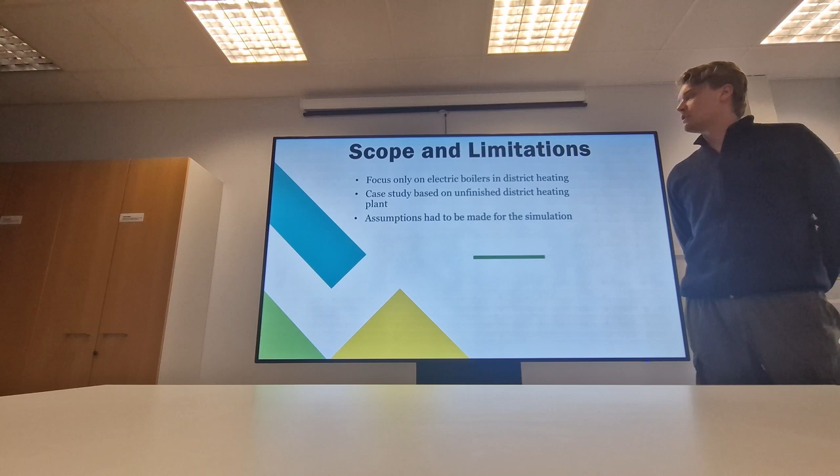Then quickly about the scope and limitations of this thesis. First of all, it only focuses on one plant that I used as a base, so it might not be universally applicable in every situation. The case study is also based on an unfinished plant, so there are a lot of assumptions made, and there are some things not yet known or parts not yet ordered, so it is hard to know exactly what the capabilities are.

You also get less heat dissipation through the pipes. So in rural areas it is much more expensive to build the long pipelines, and you lose a lot of heat in the process.

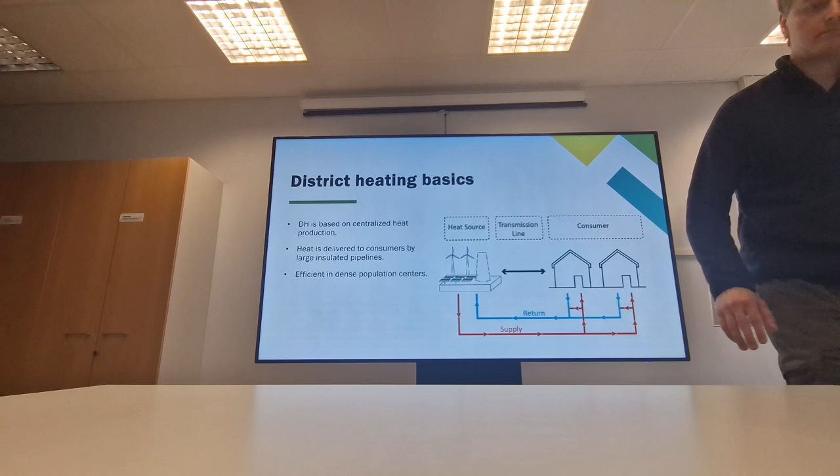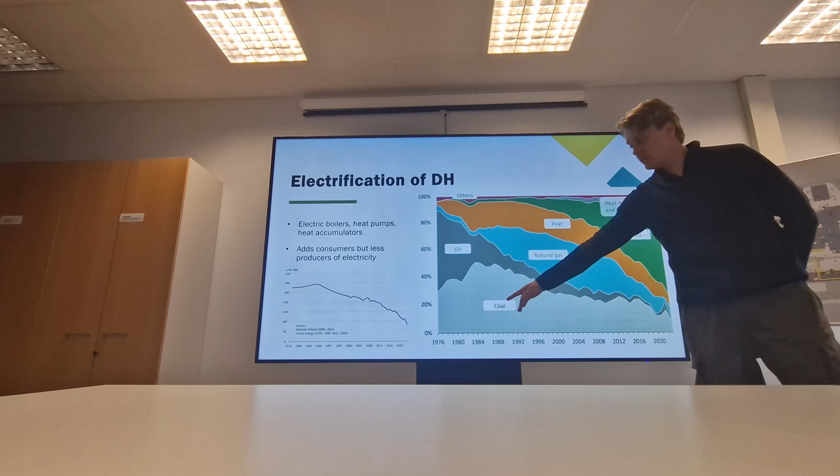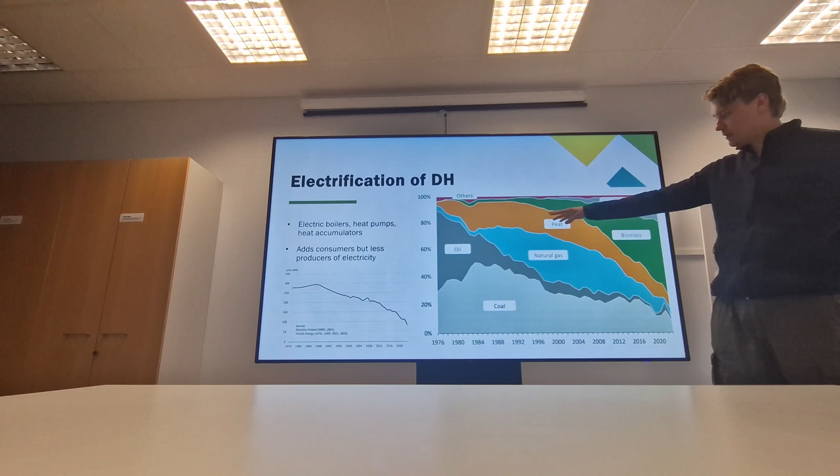Now, electrification of district heating. Electric boilers, heat pumps, and heat accumulators have made a big difference in later years, especially after around 2020. This graph begins in 1976, where you can see that coal and oil were the main way to produce district heating. It's been going down pretty steadily, and now we soon won't have any coal plants operating.

Biomass has also taken a large chunk, but heat recovery and electricity are very rapidly increasing, and in the coming years it's going to be a very substantial amount of district heating production.

Electrification, as I mentioned before, adds more consumers of electricity but fewer producers. This is part of the problem that we need to tackle.

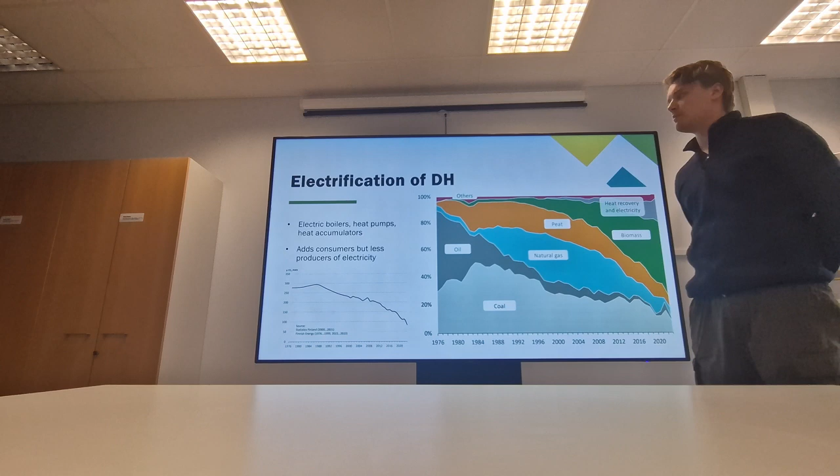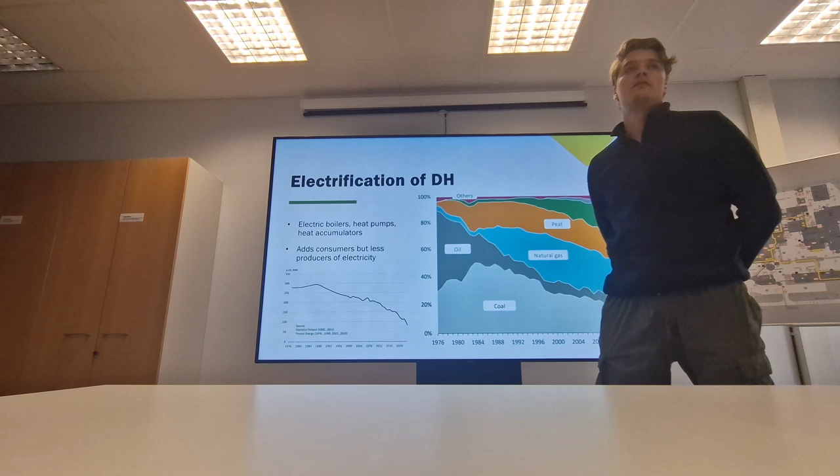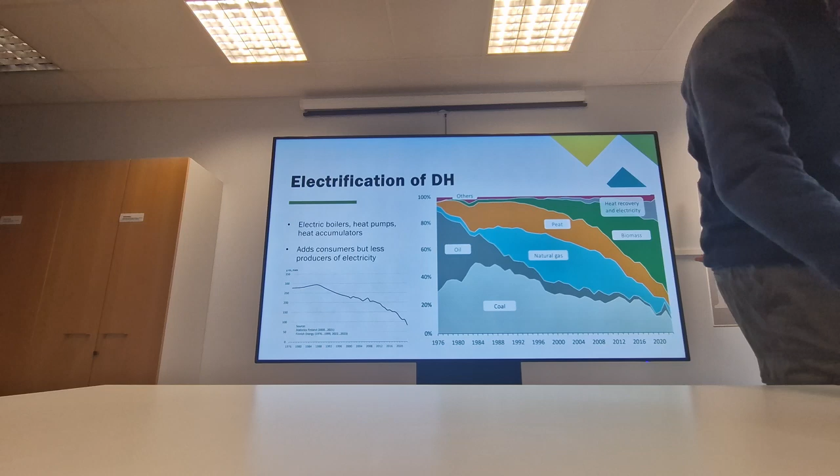Here you can also see the CO2 emissions of district heating have been going down very fast, and this is one of the reasons why it is a very good way to heat, as it will soon be a very minimal CO2 emission way of producing heat.

The main focus of this thesis is the electric boilers. As I mentioned before, there are also heat pumps, but they are not really that good at altering their power, so they are out of the scope of this thesis.

There are many different kinds of boilers, but I'm focusing on electrode boilers because they have fast ramp-up speeds and very high efficiency compared to resistance boilers, which are usually used in lower or smaller applications due to the slower rate of heat transfer to the heated medium. In electrode boilers, the electricity goes through the water and is conducted through it, and the water itself heats up through resistance.

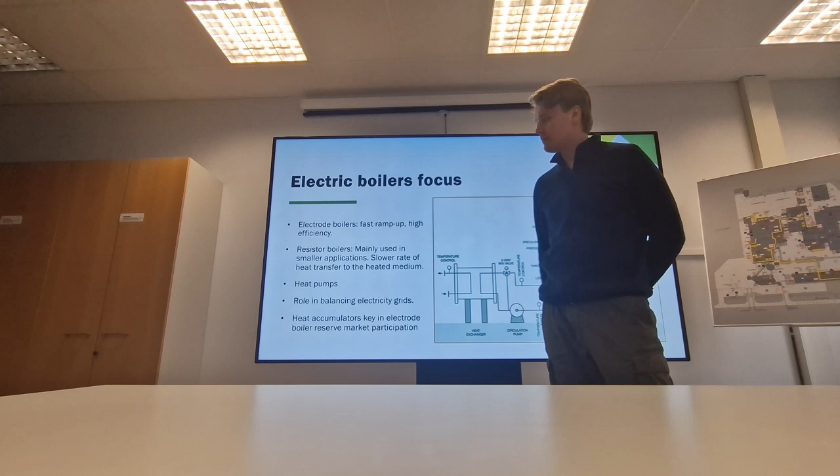These are very good because of the fast ramp-up speeds, and it is good for electricity grid balancing.

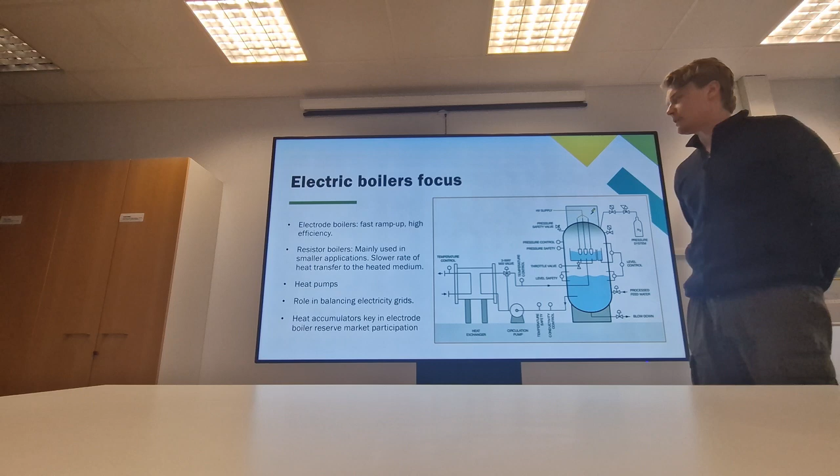A quick note that heat accumulators are very key in this, for boilers participating in the markets, as the need for heat is constant, and there's a certain temperature of water you need to supply that can't really vary that much. Big variations can also lead to problems in the network, such as pipes bursting, so we don't want that.

And then a little bit about the reserve market. So now that we have more wind and solar, there's less grid stability and need for fast flexibility. Basically we just want to have these different components in the grid that can flex according to the needs of the grid. Let's say it's not that windy someday, then we need something to either produce more electricity or reduce the consumption. The flexibility of electric boilers is very good for this.

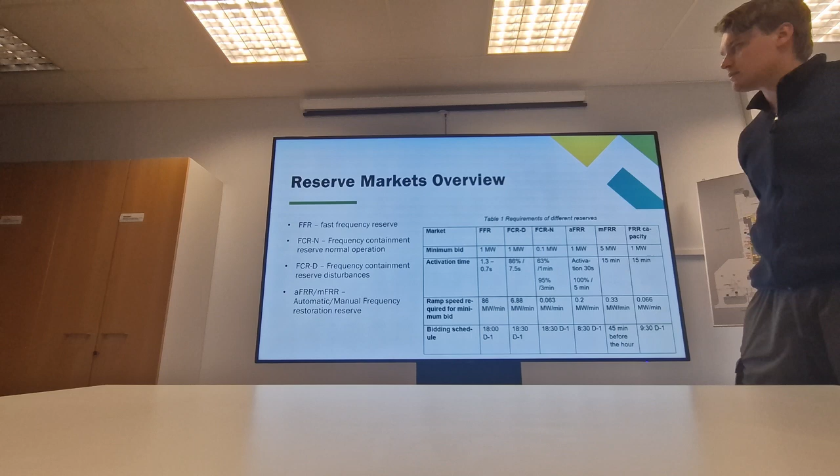Then the overview of reserve markets. The fastest one is the fast frequency reserve, which is mainly for low inertia situations where an HVDC link or a power plant fails, and then we're trying to keep the grid over 49 Hertz, with 50 Hertz being the normal operating frequency, so we don't want it to deviate by over 1 Hertz.

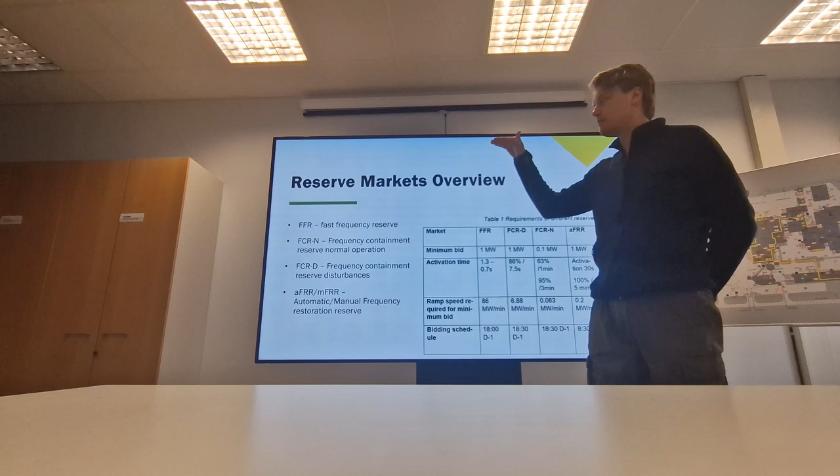The next one is the FCR-N, the frequency containment reserve normal operation, and this is for deviations of 0.1 Hertz from 50, so 50 to 50.1 or 49.9. It's activated linearly: at 50 it's 0, and at 50.1 it's full activation, linear through that range. It's continuously operating, and it's also symmetrical, so it goes up and down.

And then we have the FCR-D, which is for disturbances from 0.1 to 0.5 Hertz deviation. This is for higher deviation, so it's a little bit faster reserve, but the same way, it's linear in that frequency range.

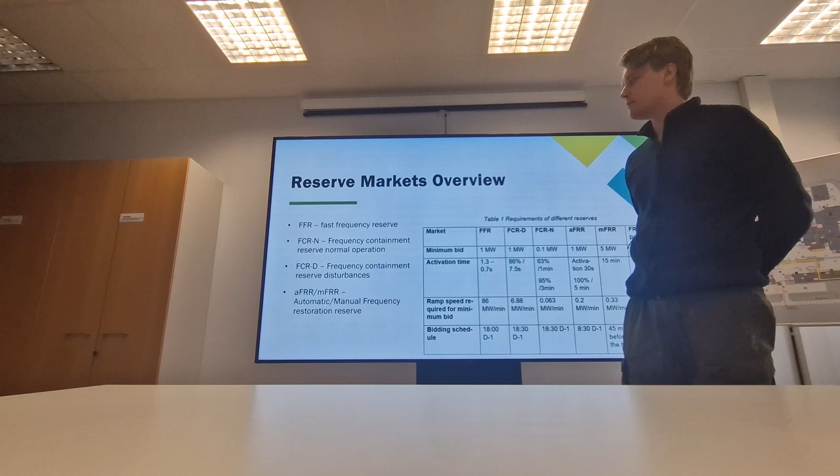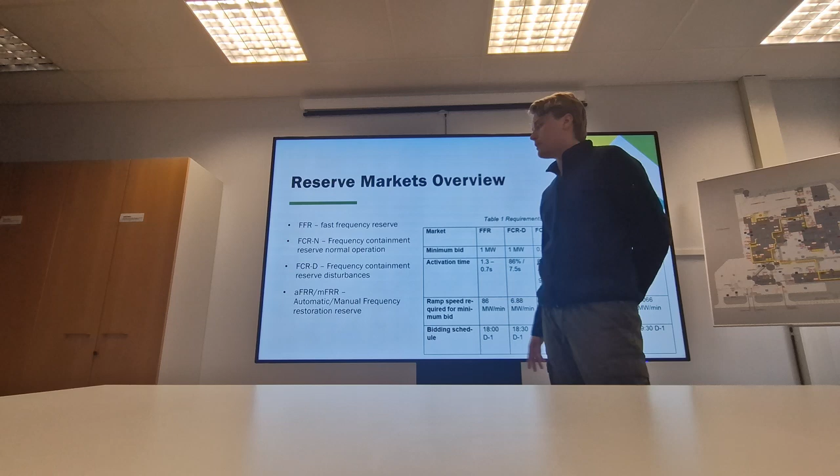And then the last one is the automatic frequency restoration reserve and manual, and this is sort of out of the scope of this thesis, because the activation times are like 15 minutes, or in the automatic case 30 seconds, and 5 minutes to 100%, which is plenty of time.

So we know that we can take part in these reserves, and we are mainly concentrating on the FCR-D and the FCR-N, because the FFR minimum bid is 1 megawatt, with activation at 1.3 to 0.7 seconds, which would mean a ramp speed of 86 megawatts per minute, and that is way too fast for district heating.

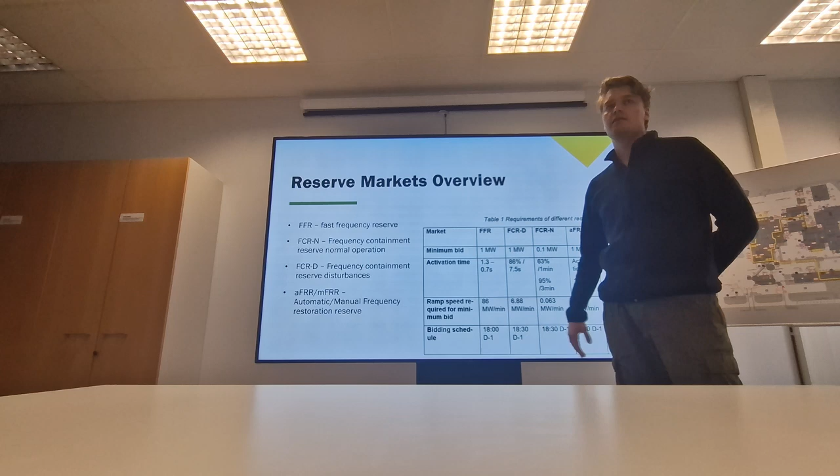In this thesis, in the later case study, the electric boiler is limited to 20 megawatts per minute for safety reasons.

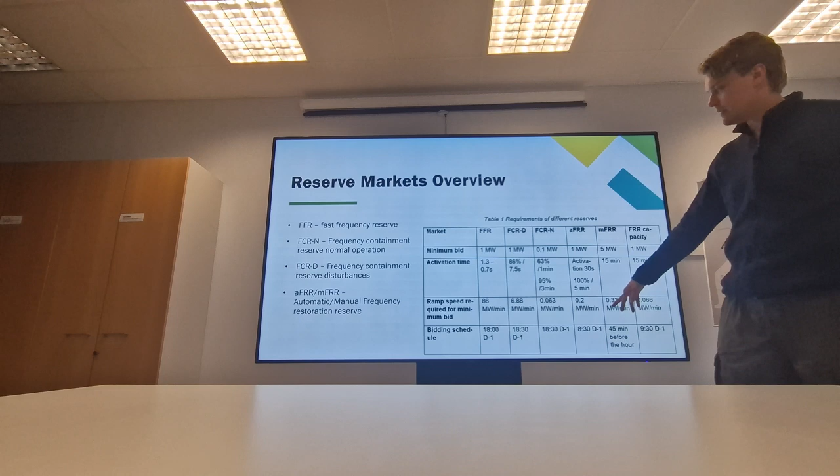But yeah, as we can see, FCRN with the minimum bid has a very slow ramp speed, and with the FCRD it's a little bit higher, but it's still within the 20 megawatts per minute. So those are our main markets.

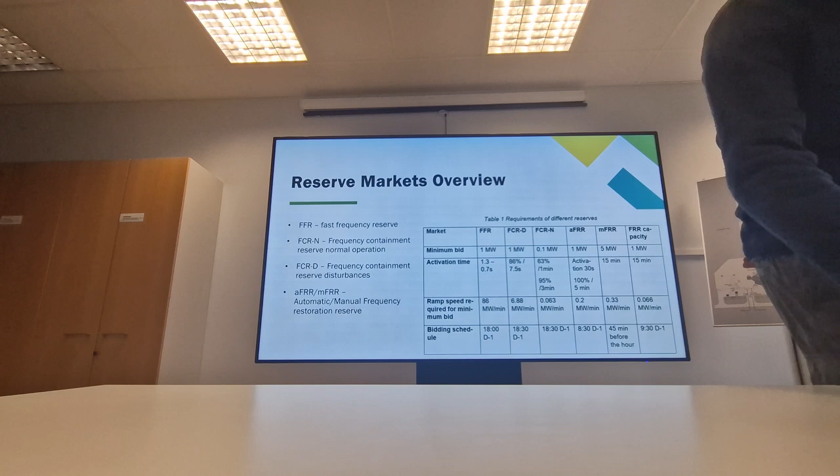And here now the case study. For the case study, I built a model using the Apros simulation tool, of the upcoming Nuijala plant for Fortum. And here is the simplified version.

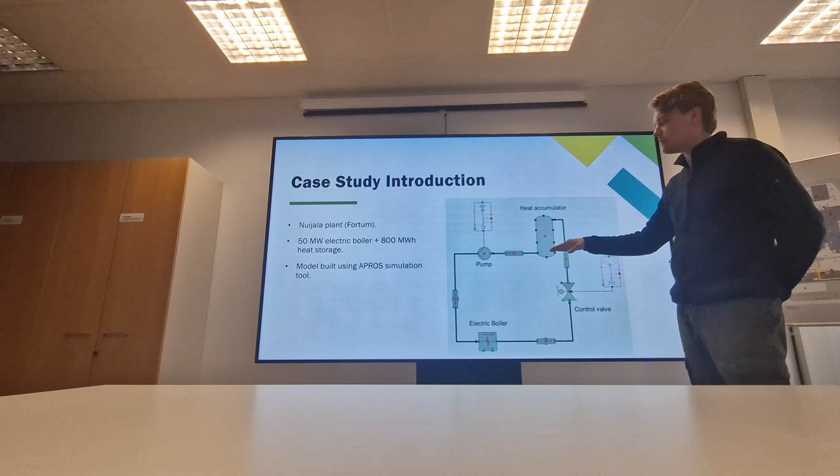So basically we have the heat accumulator: hot water goes on top, cold water is at the bottom, and it gets layered. For the simulation it's just 2 layers with no mixing, but in reality there's also not that much mixing, as it's usually pumped and emptied at a very steady rate.

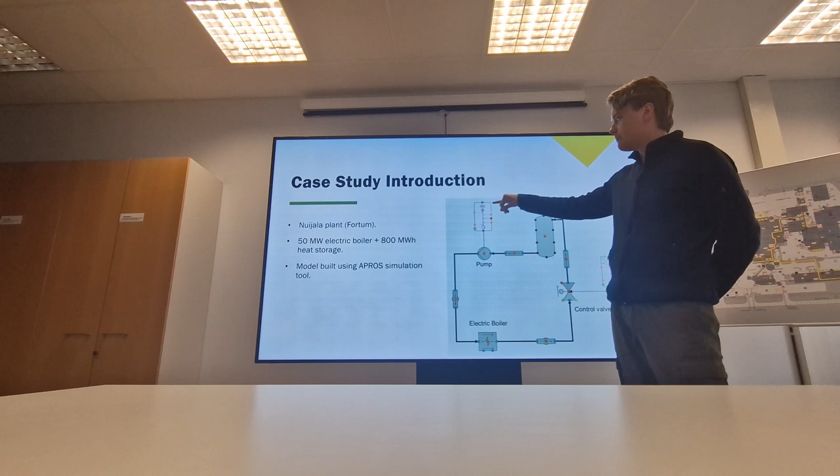Then we have pipes, and a pump controlled by a PID controller, whose main function is to keep up the pressure difference on either side of the pump, and technically on different sides of the control valve. Then it goes to the electric boiler, heats up through the heat exchanger, and then there's a control valve that changes the flow in the system.

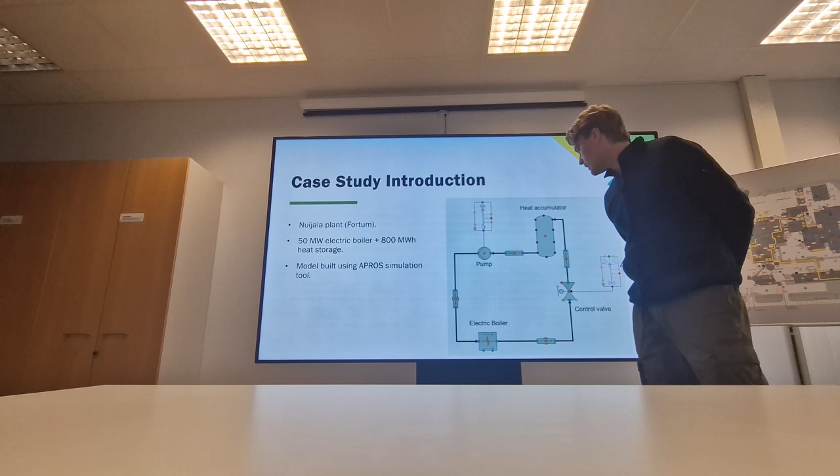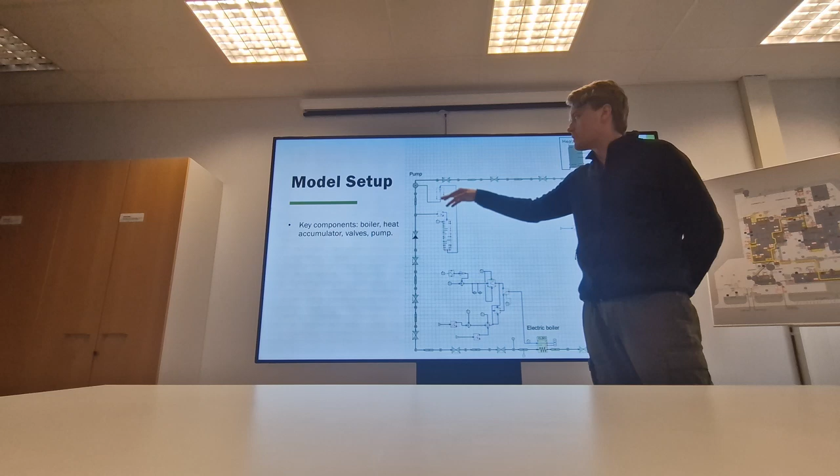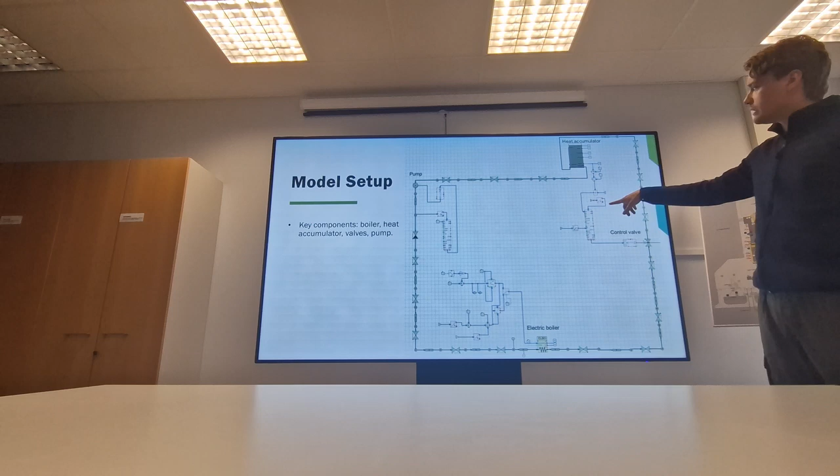These are the main components we are looking at, and here is the broader model actually used. It has more valves for accurate pressure loss, and we can see the control systems here, checking the pressure and keeping it up, and then the control valve gets from the PI controller the value of the cold water, and then it calculates what should be the flow with the desired power level from the electric boiler.

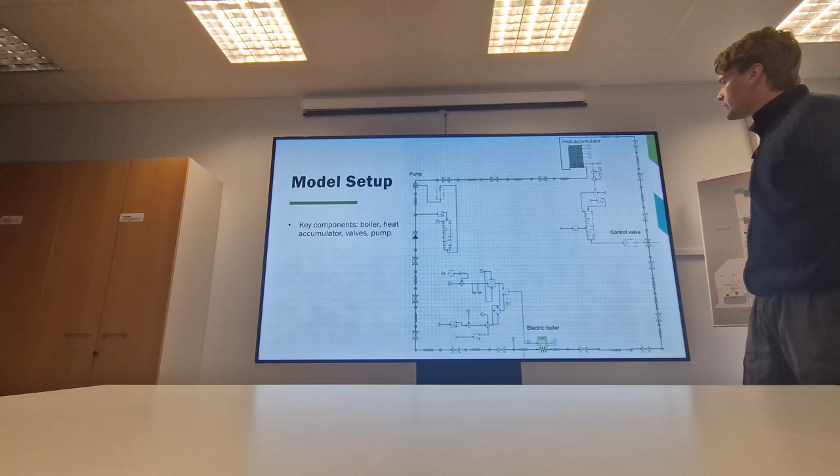So first you input the power level, and then it calculates what is the required flow rate.

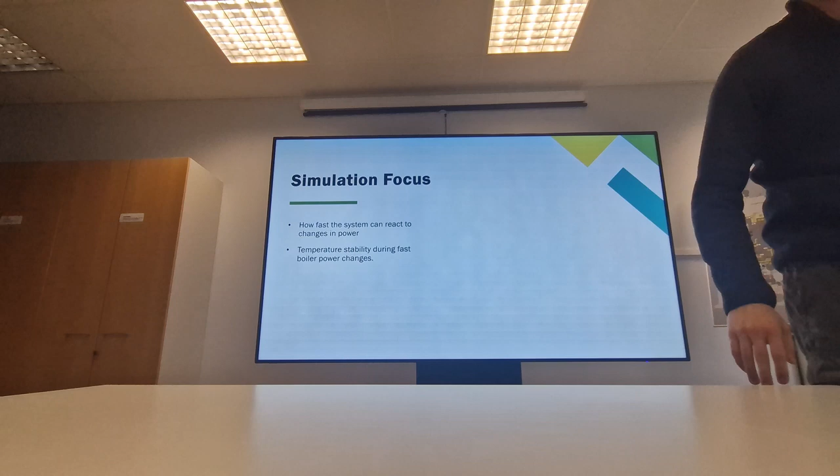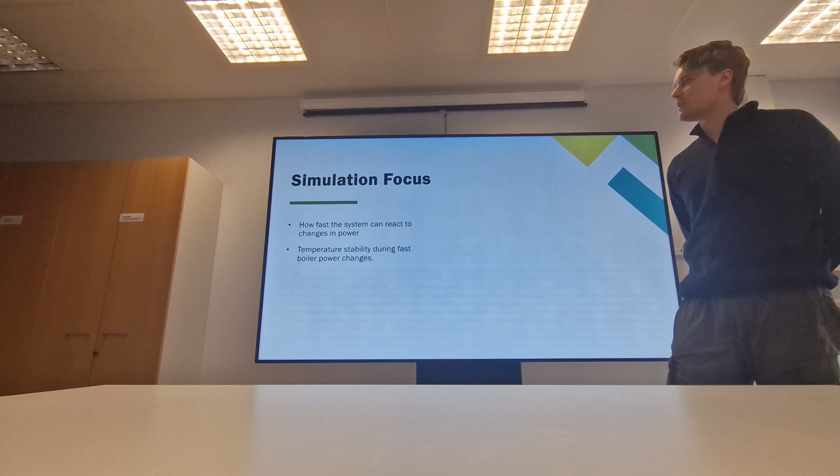And the focus is pretty simple: we want to see how fast the system can react to changes in power. We know the electric boiler can do up to 20 megawatts per minute, but what happens with the temperatures and pressures, and can we get the valve working in unison with the electric boiler so that we can get stability in the temperature, and also we just basically need the flow to match the power output.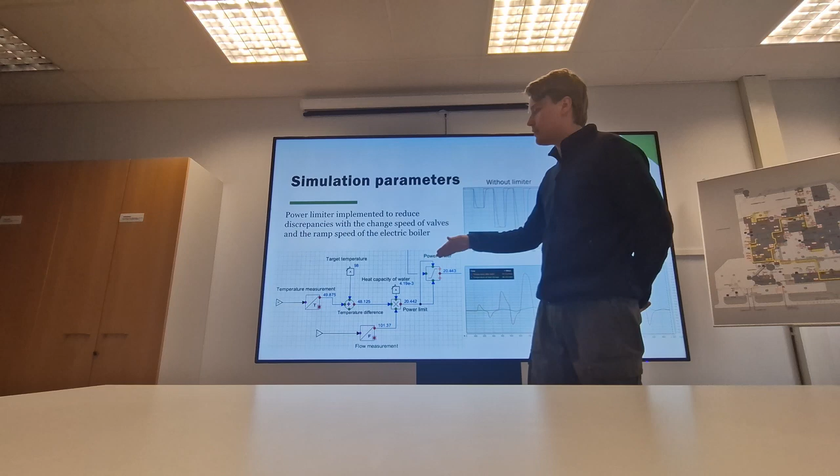And then some parameters for the simulation. A power limiter was implemented, which takes the target temperature, the temperature measurement before the boiler, and the flow before the boiler, and then calculates the maximum power output so that the water doesn't go over 98 degrees.

So it just works. We can see here, without the limiter, it is very fast. In the working example, the red one is target power, so when target power is set down, the measured power comes a little bit later because it's controlled by the PI controller.

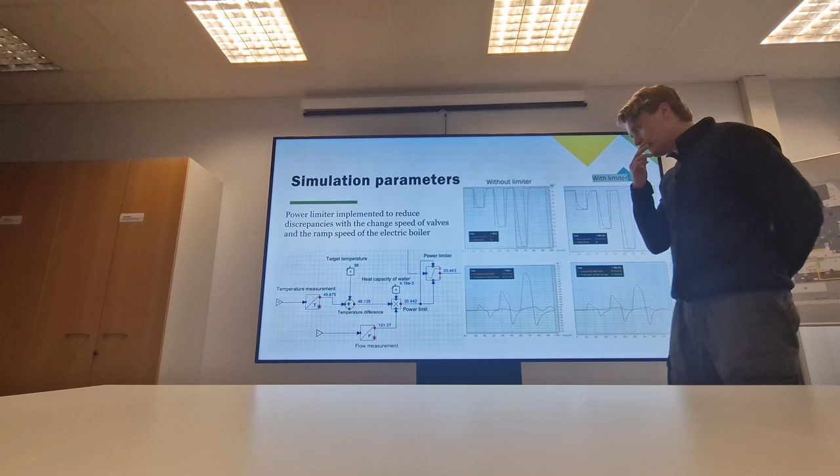Here we can see the temperature change. The red one is right after the electric boiler, which is much higher. You can see it goes up to 112 Celsius, which is too much. But the green one, when it enters the heat accumulator, which is the more important one, as you don't want it to go over 100 degrees because then there are problems with boiling and steam, and it just shuts down if it goes over that.

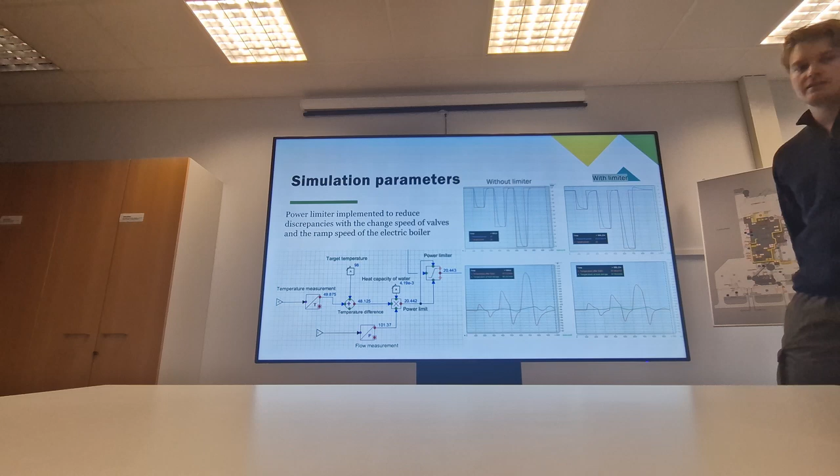So that is the more important one, but it's also important to see that if there's a large deviation, it will eventually cause problems. Here we can see with the limiter, it's sort of the same, a little bit slower to reach the target power, but the change is that the temperature stays at around 98 degrees at maximum, close to 99, but doesn't go over 100 or close to that. And after the boiler, it's only 107 degrees in this case, so it is more acceptable.

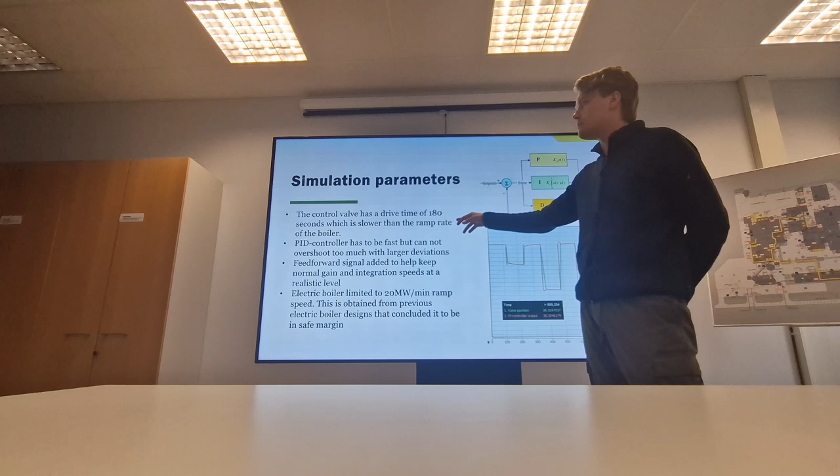And then the control valve has a drive time of 180 seconds, which is slower than the ramp rate of the boiler. So it's 180 seconds from 0 to 100% open.

And then there was the basic outlook of what the PID controller looks like. In this case it's just a PI controller, but we can see how it works. On red we have the controller output, and green is the valve position. The valve is slower than the controller, and because the controller had to be quite fast in this case, it overshoots a little, but then it meets with the valve position, and it doesn't create too much overshoot or undershoot in this system. The electric boiler is limited to 20 megawatts per minute.

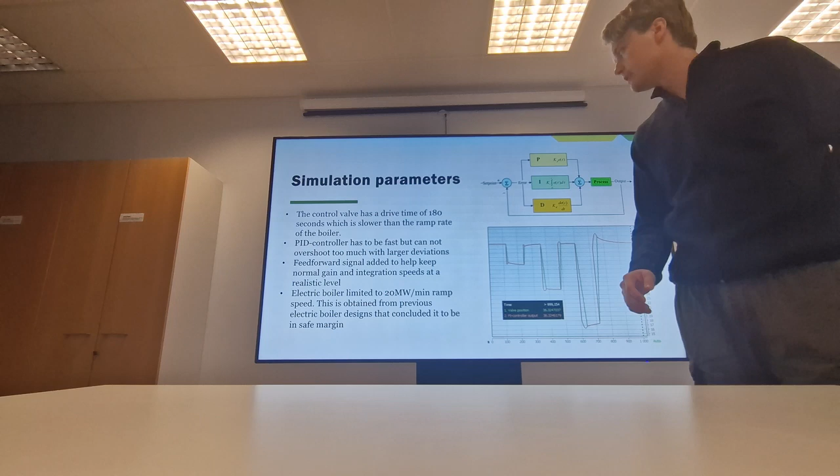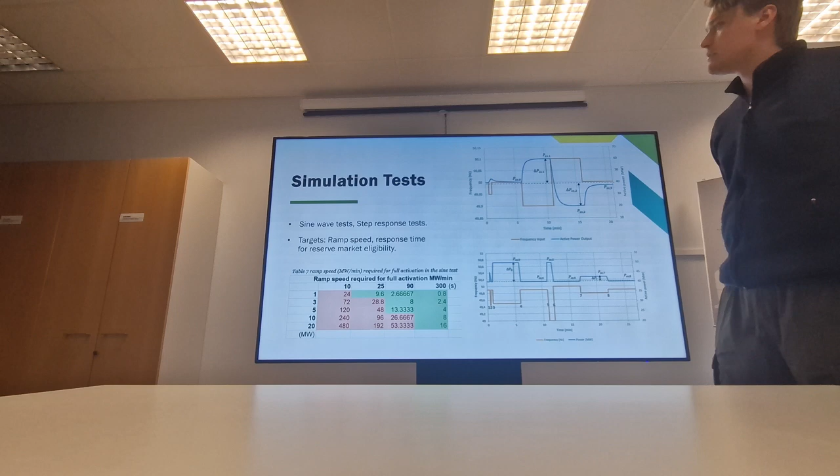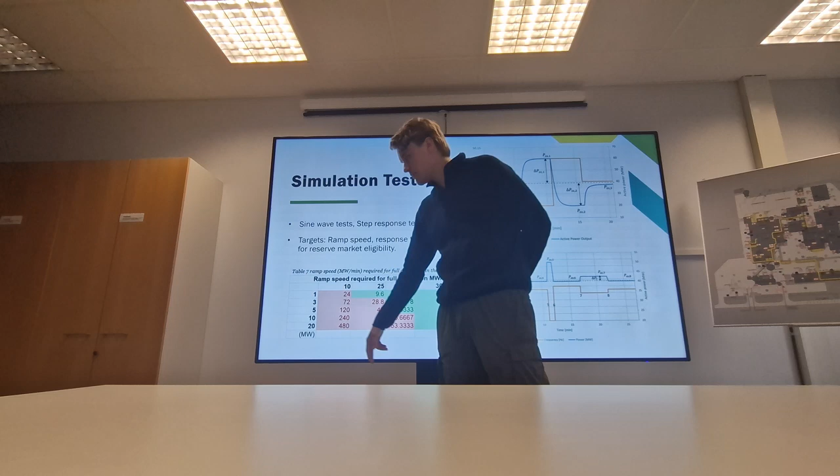And now to the tests. These are tests you have to get through to be accepted into the reserves market. Here's the sine wave test basics: you have 10-second wave speed, 25, 90, and 300, which just means how often it completes one loop. And then you have the megawatt amounts of 1, 3, 5, 10, and 20. First I calculated which go into the 20 megawatts per minute boiler restriction.

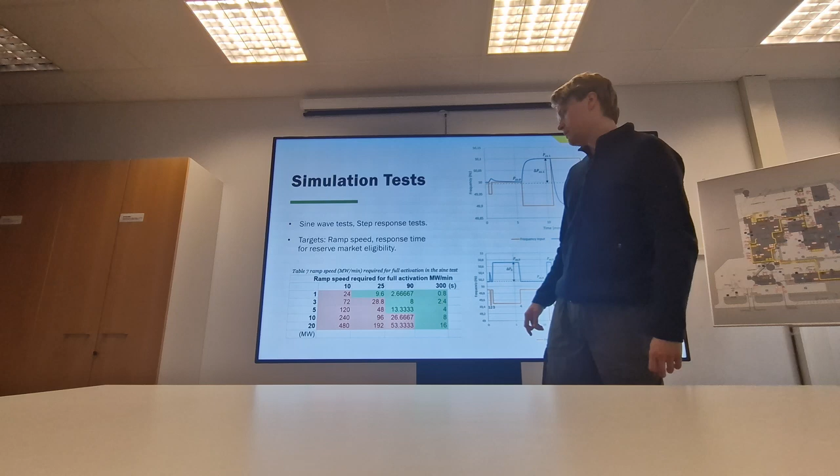We saw that at the 10-second test, even 1 megawatt is too much, and from 25 seconds we can do some. In the sine wave actual simulations, I chose the highest megawatt amount for each acceptable test: 1 megawatt for 25 seconds, 5 megawatt for 90 seconds, and 20 megawatt for 300 seconds.

And for the FCR-N, the step test looks like this: it goes down, up, and then back to baseline, and it has to be within the acceptable margins in the test. For the FCR-D, it's sort of the same, but much faster with bigger deviations.

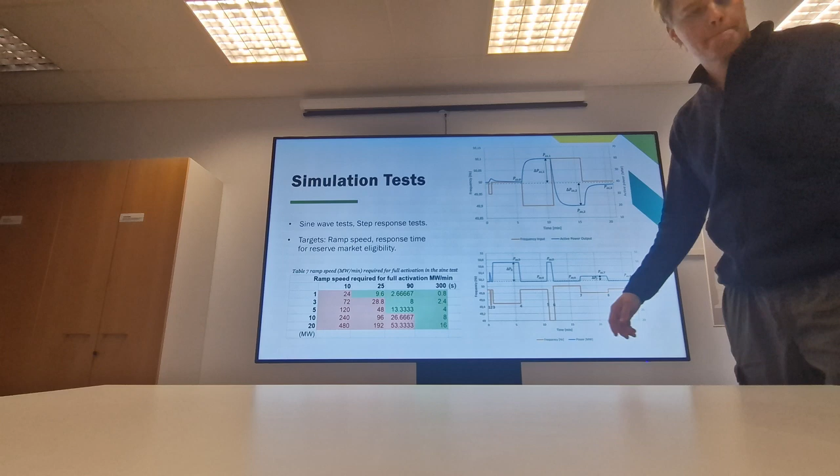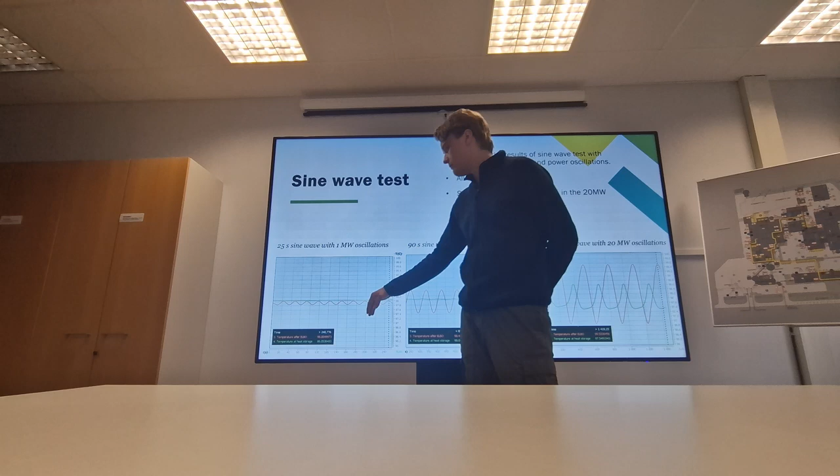So here are the results of the sine wave test. What we can see on red is the temperature after the electric boiler, and on green when it reaches the heat accumulator. We can see that for the 25-second sine wave, there is basically no difference in the temperature at the heat storage. Pretty much the same for the 90-second 5 megawatt test, but at the 300-second 20 megawatt test there's a somewhat large deviation both next to the boiler and at the heat storage. But we can see that 98.6 degrees is the highest at the heat accumulator, so it is within acceptable limits.

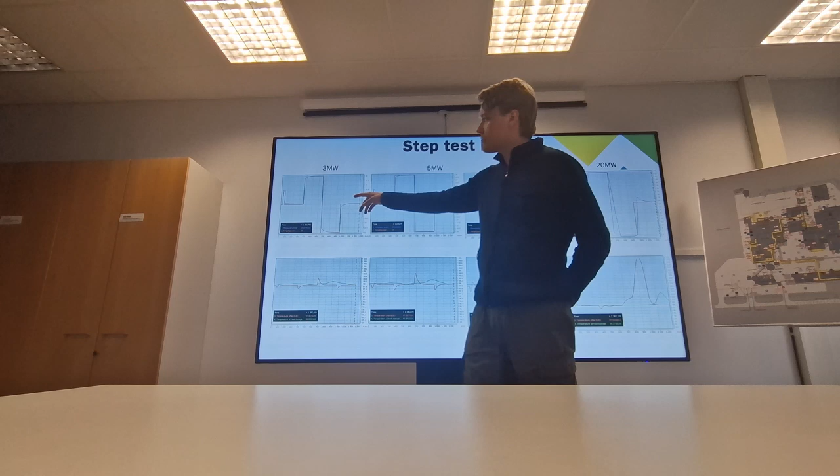And here are the step tests for FCR-N. First we have the measured power in blue, and red is the target power, and below it is the same test but just the temperature, red after the electric boiler and green at the heat storage. From these we can see that each one is within acceptable limits.

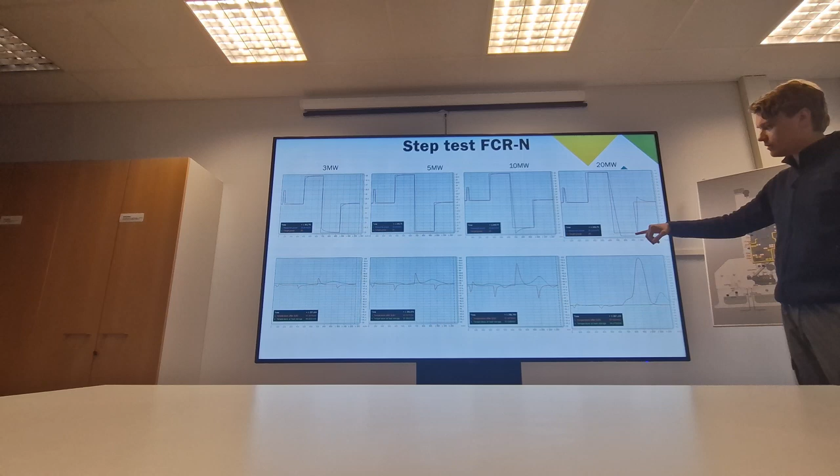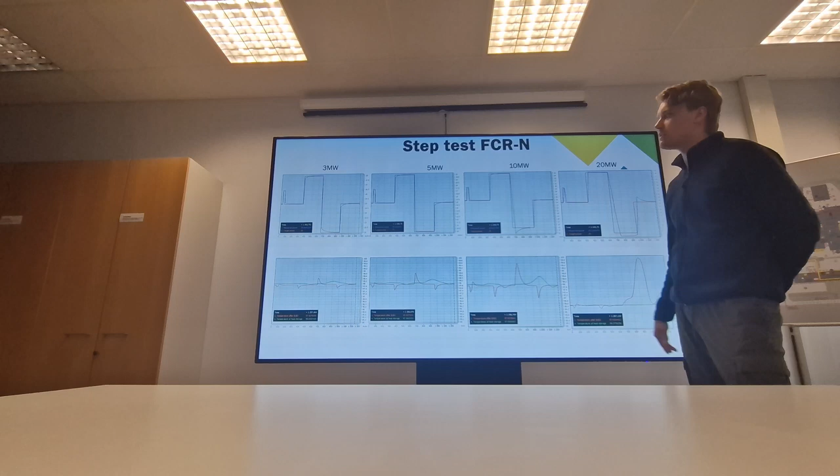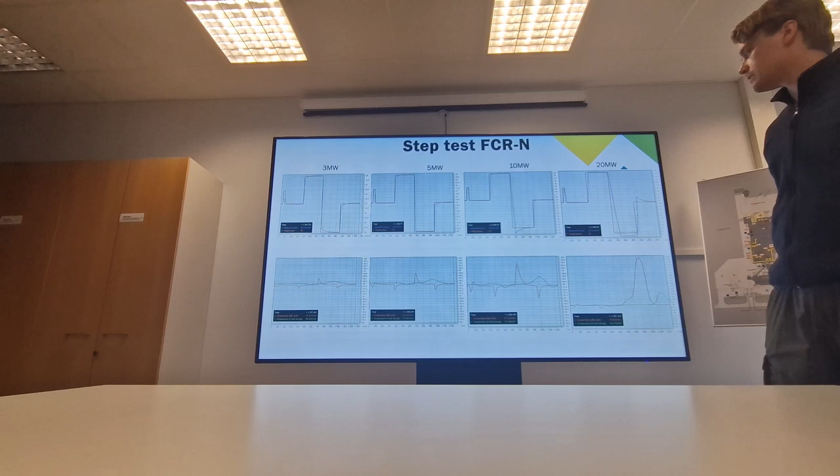The measured power reaches the target power quickly enough, and there is some overshoot in the higher ones, which comes from the controller having to be really fast, so it tries to increase quickly and goes a little over, but there's a 20% overshoot allowance and 5% undershoot, so overshoot is preferable. The only exception is the 20 megawatt test: the temperature goes to 102, 103 degrees at the accumulator, so it is not within acceptable limits, but the other ones are.

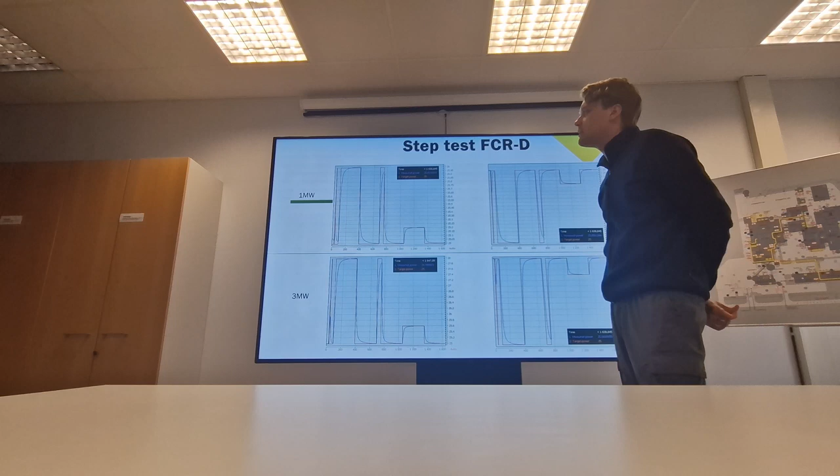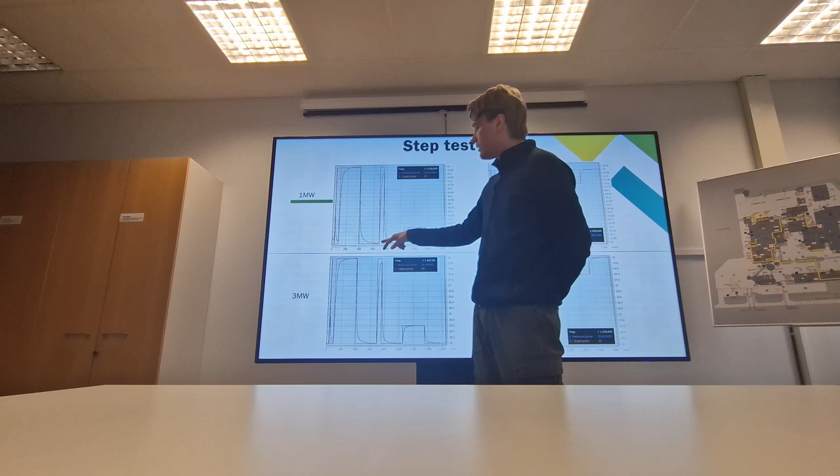But then for FCRD, I only inspected the 1 megawatt and 3 megawatt tests, as the other ones were already too fast just by calculating the speeds. Here we can see that the power doesn't even reach the bottom at many points, and same for when going upwards. So this was not within the acceptable limits. There was too much undershoot, especially in the fast sections of this test. So it would not have been okay.

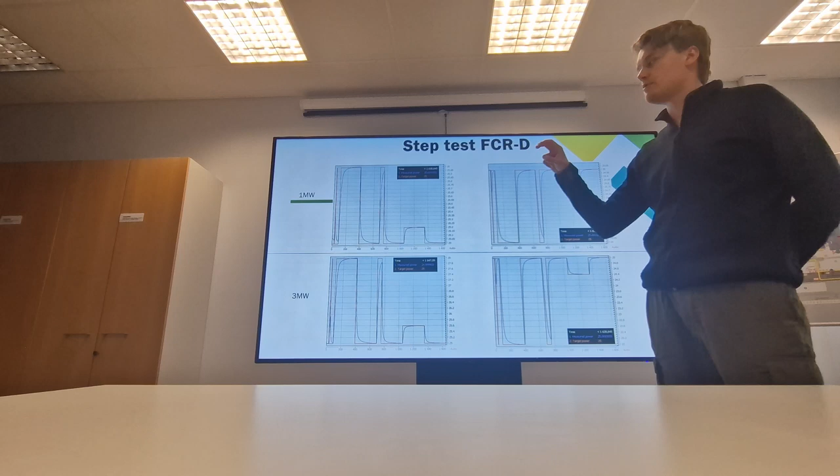But this is partly because of how the controller is tuned. So it is possible to get it to work with this system if you just adjust it to a smaller bid size, but then it couldn't do the bigger bid sizes.

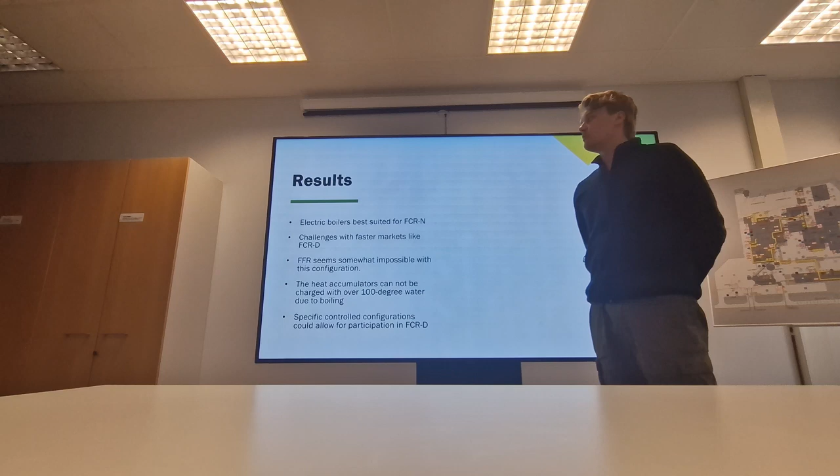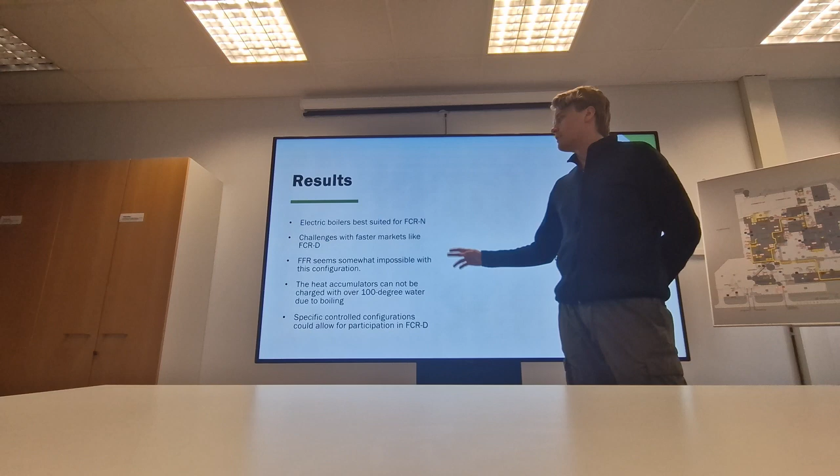So the results are that the electric boilers are best suited for FCRN, and there are some challenges with FCRD, but it is possible with specific controller configurations that could be made just looking at trying to get into specific FCRD markets with, for example, a 3 megawatt bid. It is definitely possible. And then FFR seems somewhat impossible due to how fast the ramp rate should be.

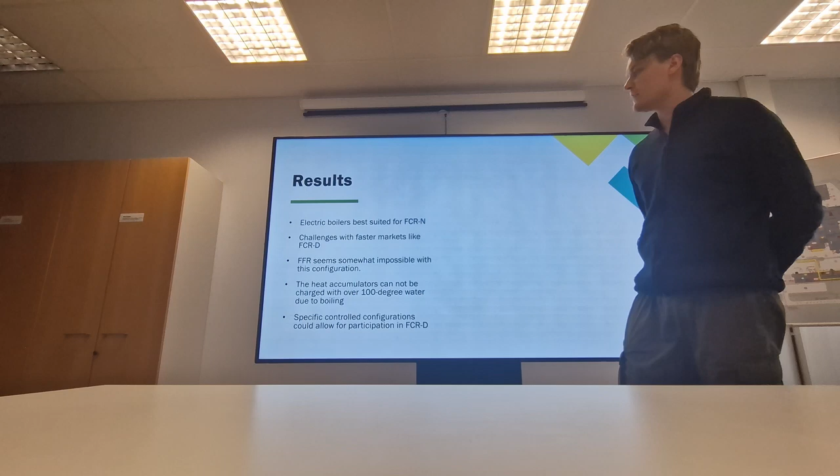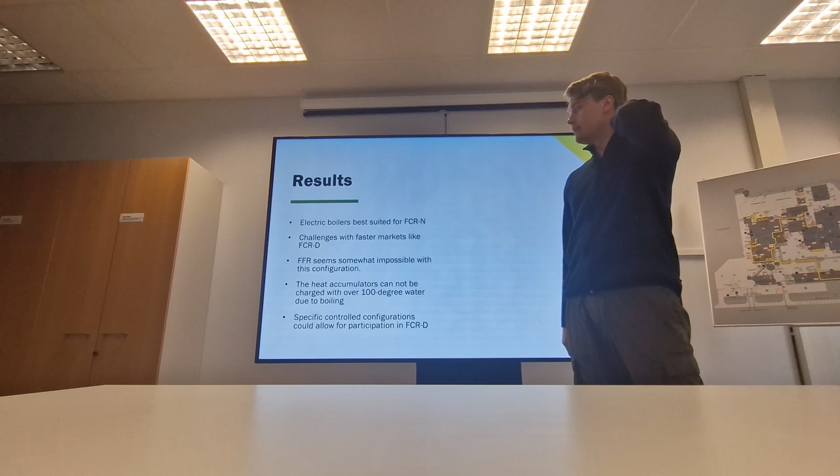And then the big problem being the temperature, and in this case the heat accumulator cannot take over 100 degree water, and that was the limiting factor in many of the failed tests.

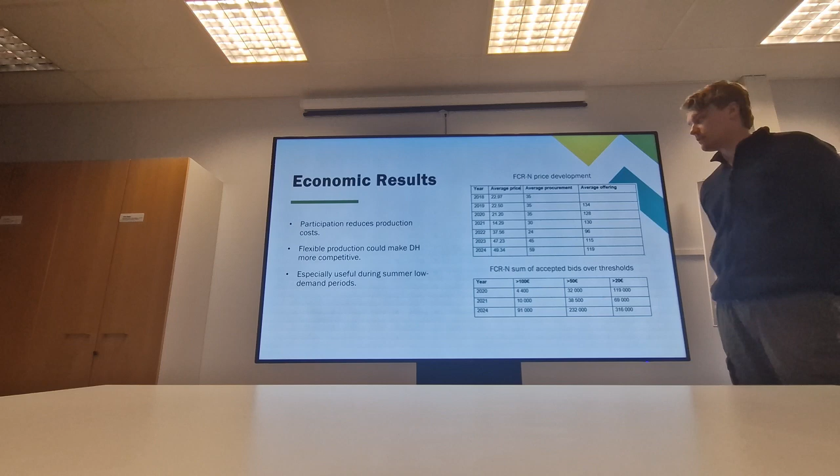So there is a lot of money in here, because as we saw, 20 megawatts could be possible, 10 definitely could be possible, so that could amount to 3.16 million a year extra revenue.

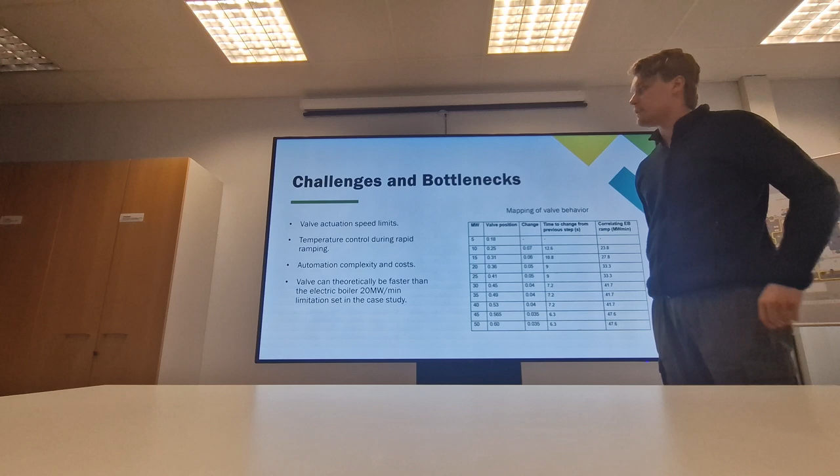And the challenges and the bottlenecks, obviously the valve actuation speed limits. But here you can see as the valve is not entirely linear, at first it opens much more for each megawatt increase, but for example if you are running it at 5 megawatts and want to get it to 10, then the ramp speed is 23.8 megawatts per minute.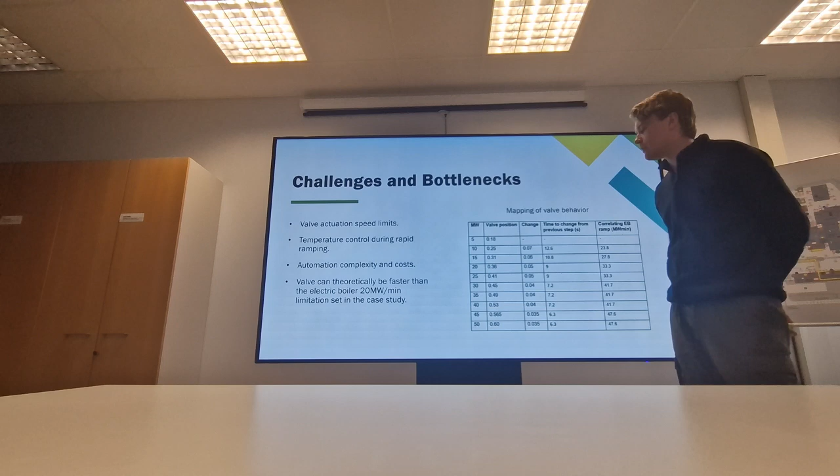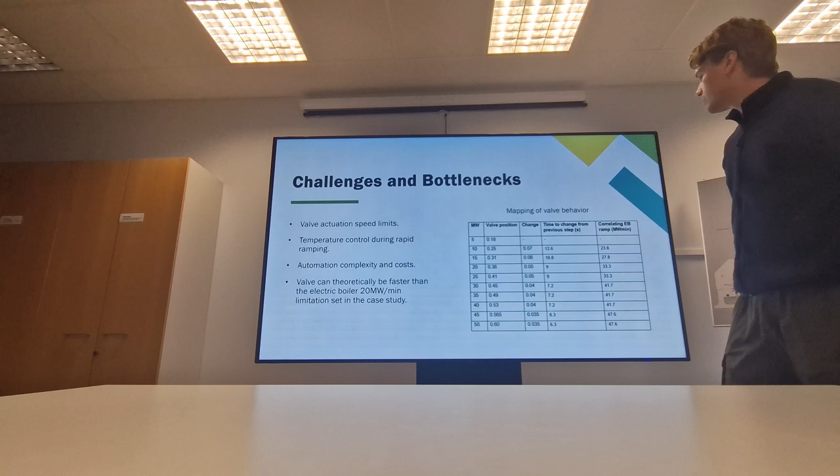It's the correlating curve. This doesn't account for the controller's slowness, just if the valve would move linearly. And then from 45 to 50 megawatts it has to open much less, so then it correlates to 47.6 megawatt ramp. So the valve might not actually be the problem.

There are also obviously faster valves that could be used, so it is one important part to think about. And then the main problem is the temperature control during rapid ramping, and this comes down to how the controllers work and how it would work together with the electric boiler. It could increase the automation complexity and costs.

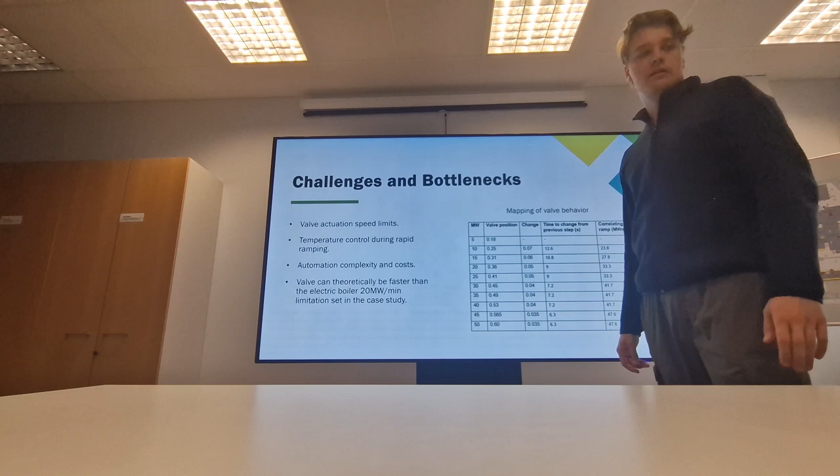And there is potential to increase the electric boiler ramp speed. This was just set from earlier designs from earlier electric boiler plants.

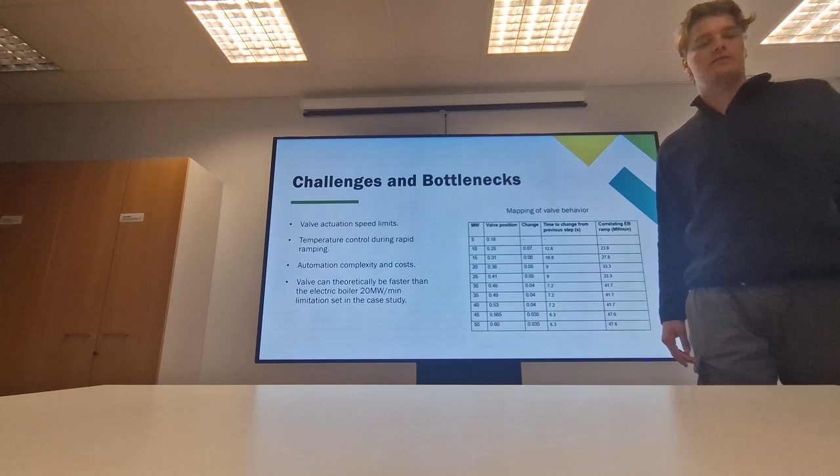And the future outlook is that many of the reserves are growing. There are a lot more opportunities and more flexibilities needed in the electricity grid. And for FCRN, the future looks okay for now, as we can see what is the situation in

Sweden, where the FCRD prices have gone down dramatically. They have basically flatlined to around €5 due to a lot of electric batteries entering the market, and this will most likely happen the same way in Finland. But still in Sweden the FCRN prices are quite high, and it looks good for current investments.

Conclusions: electric boilers definitely can stabilize the grid, and it is a very good fit for the FCRN markets at around 10 megawatts and above, if configured correctly.

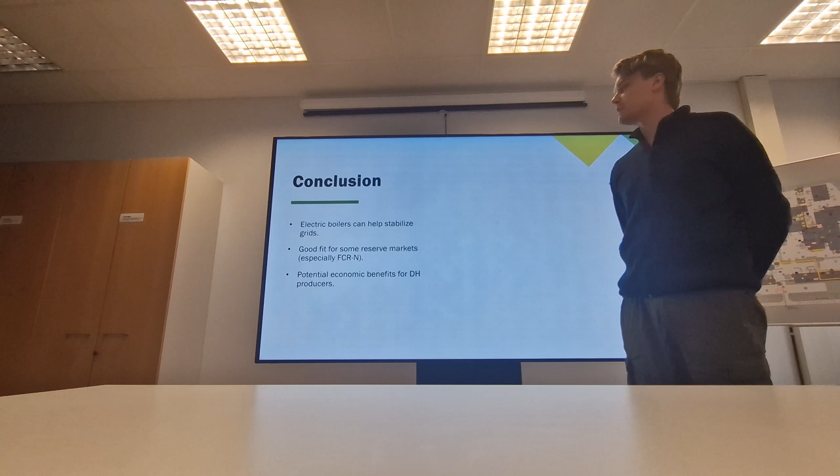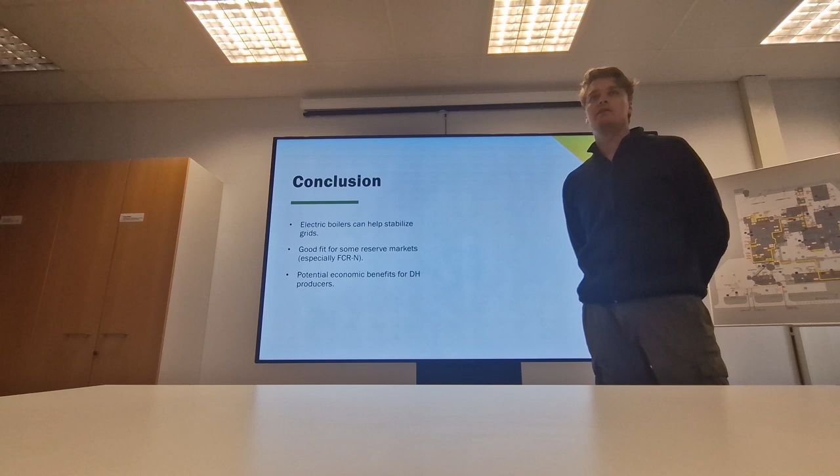And then this would drastically bring down the district heating production prices, which could increase the expansion of district heating and also get us more CO2 free energy production, in this case heat production.

And future research: there's a need for a model that is also connected to the district heating network. Right now it was only the electric boiler and then the accumulator, but you could add the district heating network into it, and you can also make configurations where you run it through the accumulator into the grid, where it works as a balancing tank in the middle.

So it is definitely possible to run it to the district heating network through the accumulator, just having to keep it under 100 degrees. And obviously there are possibilities of higher pressure tanks that could work above that temperature.

And then full economic models over multiple years should be studied, looking at how realistic it is to offer it, and when you could offer it into the markets, as it has to be running because the FCRN is symmetrical, so it has to have space to go up and below.